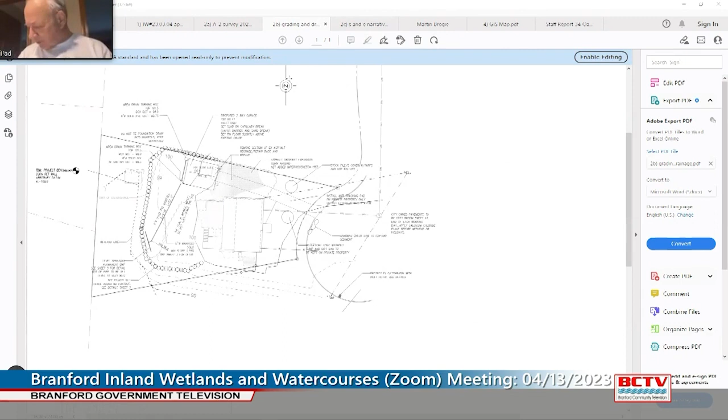So, is the map I'm looking at that was sent out different than the map you have? There's 3 pages, and I think the first page is front and back, so you might need to flip over the site plan. Is this what you're looking at? Thank you. Yep, got it.

There's also a slight discrepancy in the location of the shed between the 2 site plans. Nothing that should really have much of an impact on the wetland, but I've also asked for that to be clarified, just to make sure everyone's on the same page and it's being constructed where it's proposed.

So my question to the commission is, do you want drainage calculations? Do you want a perk test for the proposed level spreader location prior to implementation? And do you want to hold on to this application for review at the May meeting, or do you think it's appropriate for agent review?

And the level spreader is where again? The level spreader is located in the southwest corner of disturbance, pretty much. And Jaymie, this is Commissioner Botta—what's the distance between the level spreader and the wetland line? I believe it's approximately 10 or 15 feet, if I remember correctly. Let me look it up.

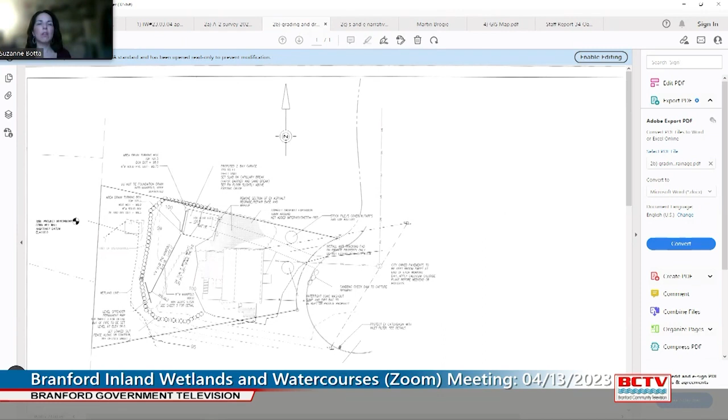At its closest location, it's about 13 feet. Well, the perk test that you were wondering about—where were you envisioning it, because the level spreader's function is just to slow the water down and to dissipate the energy, yes?

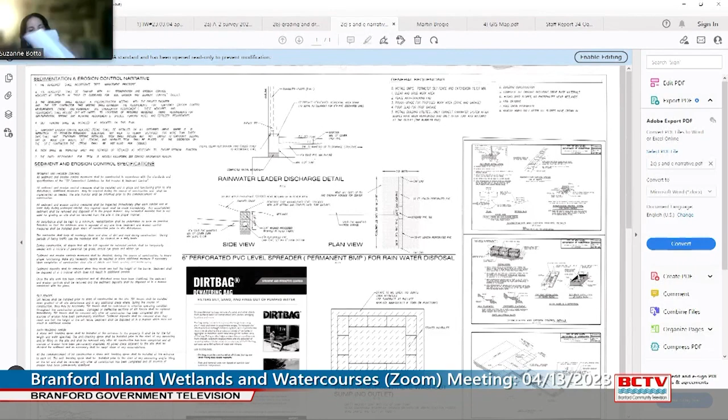So here's the detail for the level spreader. It's underground, and it's proposed to have grass over the top. So it's kind of more of an infiltrator in my understanding of it than— It sounds like it if it's underground. Yeah. Which is the third page of the 11 by 17s.

And is the intention that they'll get the first flush? But it's for a 2-car garage, and then the overflow is the bypass—there's a bypass T, so it would basically overflow and discharge at grade. So my thought is, if this infiltrator level spreader isn't really going to work if it's going to be in groundwater, it would probably make more sense to have it just sheet flow from the garage or do some alternative drainage management, rather than dig up a trench across the yard and put in stone.

So I don't know. Yeah, this is Commissioner Botta. I tend to agree - that close to the wetland, I can't imagine they're going to get much infiltration there. I'm not really sure what the function of

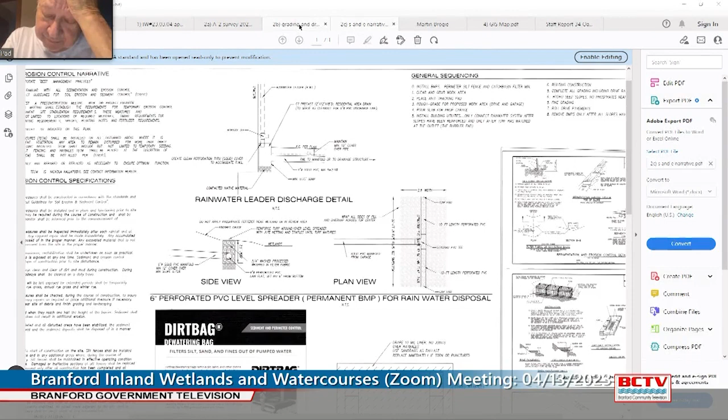Or some other alternative drainage system if the homeowner doesn't want to have it sheet flow. How much yard are we talking here for it to dissipate? So from the garage to the wetlands, about 40 feet.

It looks like I didn't throw the pictures in the Dropbox, but I believe I do have some pictures of the yard if you think that would be helpful.

I mean, this is Commissioner Botta. I wouldn't want this to go to agent review. I think we should look at this one more closely. I think if you're going to go back to the property owner, it would be with these couple of questions - we need some clarification on why they are trying to infiltrate.

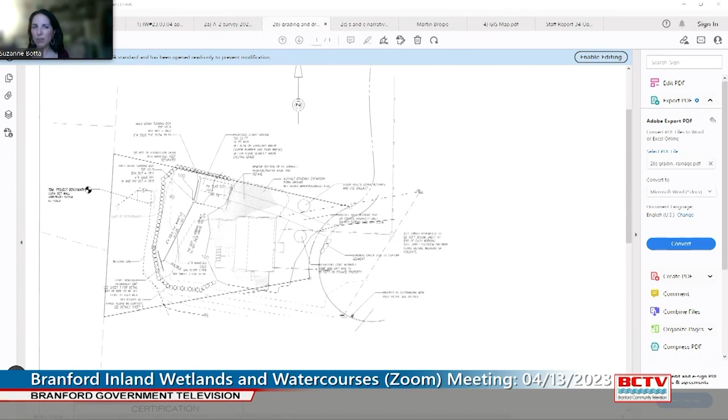Can the ground there even take any of that water in, so they can do a perk test? They could also consider a different way to manage this water coming in, because it doesn't make any sense to have it infiltrate that close to the wetland.

But maybe their engineer has a solid explanation as to why. I would just be curious to hear from their engineering how they came up with this plan and what are some other things they considered as they planned.

This is Commissioner Basson - I think as well, I don't see any calculations regarding the hydrology. Yeah, I did have a brief conversation with the engineer about the fact that there were no calculations or perk tests. He said he did have a conversation with the client that those things might be required and that he could submit them upon request. So given the timing of that conversation, I figured I'd ask the commission.

So I will follow up, and it'll be continued to the May meeting.

Next up, inland wetland 230305, 122 Flat Rock Road for a pool. Possible agent approval. Jaymie Frederick, inland wetland agent.

So I met with the pool contractor on site based on what we discussed, the scope of work. I said it could be an agent approval, but the application materials that were submitted kind of lacked some clarity and information, made it look like activity was going on to a slope. So I'm looking for additional information to clarify.

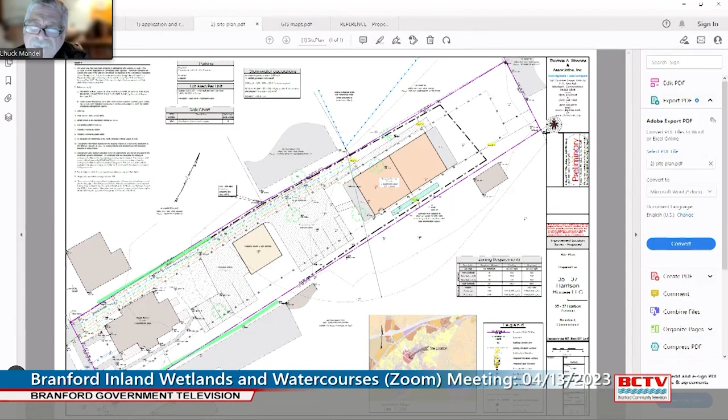I should have asked for an agent approval to save time, but that's up to the commission. If they want to set a walk, feel free to, I will stake out the buildings if they want to see it. The garage we're showing to the west is just a future proposal. We're not proposing that at this time, but we did show it in case we could get the approvals. We're just going to add that, but we're not really prepared to do the construction at the same time with the other structure. We're also proposing to capture the first inch of stormwater. That's the cyan area to the east of the building.

This is Commissioner Bassman, just to make sure I understand the clarity associated with what used to be a wetland is no longer - when was that determined? So on our site, there are no wetlands, and the site to the north, in 1999 it was a filled wetlands. Yeah, there's the report right there.

So just to clarify, in the 1999 investigation, it was still considered wetlands on the adjacent property. It says shallow fill, and based on the wetland delineation approval at the time, it was still considered a wetland, but it was an impacted wetland. They did do a wetland investigation for the subject property. There are no wetlands on the subject property. I do think there is a slight sliver of wetland area.

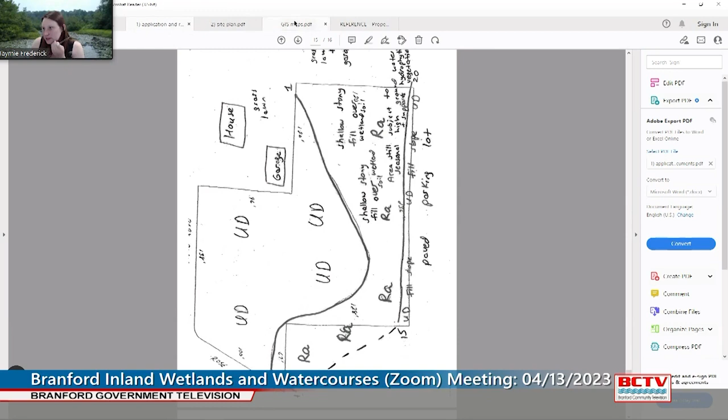So this is the subject property right here, the existing house, demoed garage, and the proposed structure would go somewhere in this area. I think there's a little bit of wetland still existing adjacent to this parking lot, and there's definitely wetland further north and west of the subject property. So I do think it's still within the commission's jurisdiction. I think this area of 42 Park Place, if it were to be redelineated today, it might go from slight fill to having characteristics that would no longer be wetland. I don't know - so that's kind of the wetland history for the off-site portion.

Chuck Mandel, if you go to the GIS, it appears to be lawn area right now.

This is Commissioner Bassman. In the subject property 3537, it looks like there is kind of an elliptical area - I don't know if it's a depression or not. That's a contour. My guess is it's showing as a slightly higher elevation. It could just be because of the tree cover, or it could actually be a slight high spot. I'm not sure.

Chuck Mandel: Commissioner Bassman, we did do some topography. If you go back to the site plan, Jaymie, it's relatively flat, but there has been some activity, I guess, so you can see a depression right in the center there. Oh, actually, that's a tree right there, but it could have pushed the grade up, so the aerial contours might have shown that as a little hump in the lot.

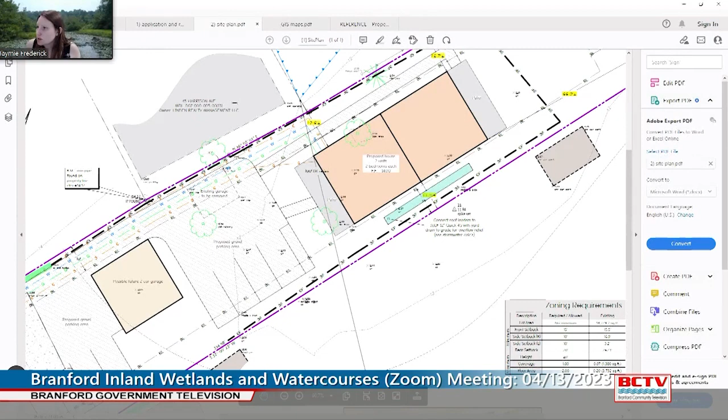This is Commissioner Bassman. Does any commissioner feel the need for an updated assessment of wetlands or not? Well, to clarify, they did do an updated wetland assessment on site. We can't require them to do an off-site wetland investigation. So my assumption is that there's still some remnant of inland wetland, which is why I required that they submit an inland wetland application. So I would say there's no further wetland investigation for them to conduct. They've submitted the new wetland assessment.

Right here, CLA engineers, soil scientists. Robert Russo went out October 21st, 2022, and investigated on site. The soils at the site show signs of past alteration and no wetlands or watercourses regulated by the town or state were present. Chuck Mandel noted, in addition, that band of wetlands Katie's referring to is actually there.

That's been filled. The adjacent lot is all parking right now, so there's a large area there. If you went to the aerial, the GIS aerial, you could see that it's all paved parking right now. You can see the cars parked along there, and that's a relatively steep embankment. At the base of that embankment, there's standing water at times.

That's absolutely possible, yes, but it appears to be a very low value. If it is wetlands, it's been severely compromised at this point, and our proposal is going to create no additional impact to that wetlands.

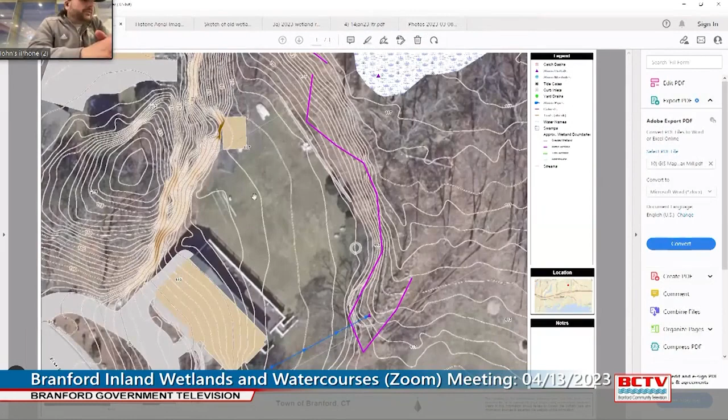Commissioner Bassman: Where does the property line in this picture rest, Jimmy? Is it on this side or the other side of that tree that's right in the middle standing up? I do not know where the property line is, but it's well on the other side of that bent-over tree. There's a lot of fallen trees pretty far back in that area, and that is on your property, right?

I'm sorry, what was the question again? A lot of the trees in that picture - if you said it's way on the other side, those fallen trees - here's the house, here's the wetland line, and the property line's way back. Quite far back. Got it.

And all of those trees are large trees that are just down in contact with the earth. You can kind of see them basically on the wetland line and on the other side of the wetland line. And on the slope itself, there's a lot of woody debris, cut limbs, things like that.

That's what's on the slope - the Christmas tree, that stuff - that's what I'm looking to do, just general homeowner spring cleanup with brush, all that dry brush. Not to include those fallen large trees. No, I don't, I would not. I'd rather not move all those fallen large trees.

When Matt Davidson came out, he felt that would disturb a lot of wetland area, just because those are the ones that came down in the microburst. Some of them still have large root piles that are attached to them. So because he walked through there and felt a lot of that was in contact with the soil itself, he felt that over time that'll just eventually become part of the ecosystem back there.

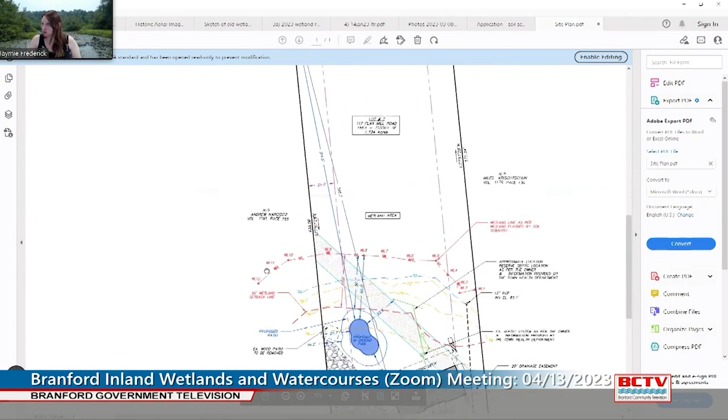Yes. So this wetland line you're seeing on the site plan is a new delineation that Matt Davison did within the last month or so. This is John Sewell, the homeowner. He did it on April 5th.

This is Commissioner Begeman. I don't know if anyone remembers when we were looking at that school, it was a school that had grass all around it that was once wetlands, inland wetlands. I don't remember if we had the old lines and the new ones on it, but that would be something to take a look at. This town property had a new wetland investigation done by a soil scientist. There was no updated map.

This is Commissioner Botta. I would say for the sake of caution, I would include those. I need to think about it and look back at some of our guidance from the state, and this is not the moment to do that, but I need to look at that stuff first. The most conservative thing to do would be to put in a historic line, and that won't hold them up if we end up saying you don't actually need that. But it would be better to put it in and be able to remove it than for that to be a sticking point later. I just need to look at some of the guidance from the state and the legal updates.

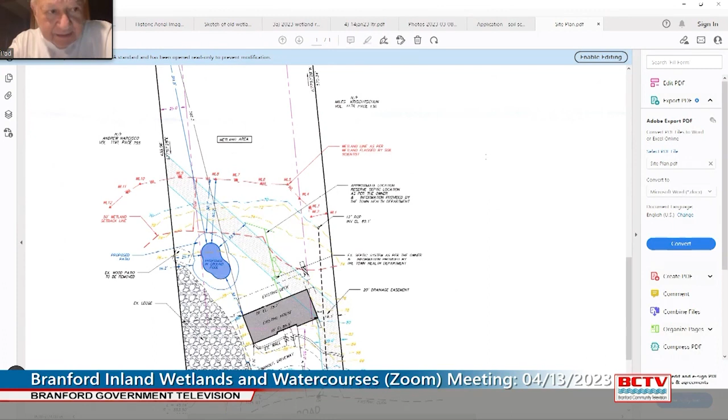Okay, this is Commissioner Bassman. By the way, when I sit on a state wetland conservation group, hardly anybody files that process that Jaymie talked about, because it's a cumbersome process. It takes time away from the day-to-day, and people don't want to invest the time in something when they can denote it as informal and get kind of the same intelligence without having to go through that formal recognition process.

Back in 2016, when we were possibly going to get new model regs, they were also looking at trying to promote a revision to the state statutes to modify the map amendment regulation process to make it a little more user friendly all around. But those things kind of just got tabled and never moved forward.

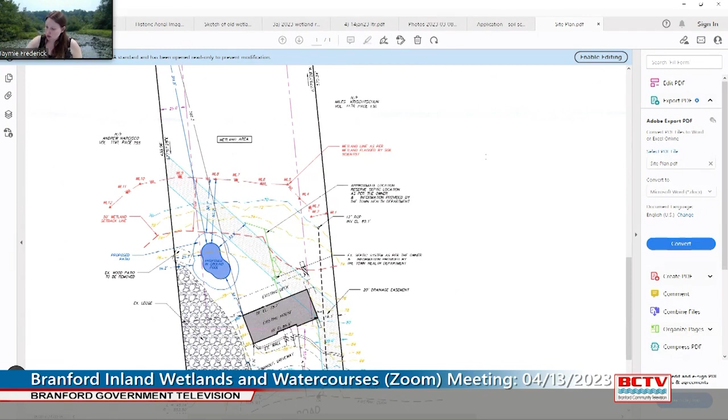So I would just say it sounds like what we're doing would be consistent with recent practice. If we're looking to change it, we should just document what that is moving forward to make sure that we are treating all applications uniform and fair.

So we will have them add the old wetland line in addition to the silt fence, the revised 100-foot upland review area, and stockpiling location. Is it important to the commission that the pool enclosure fence is added to the site plan, or are you okay with me reviewing that when the building application is submitted to make sure there's no issues with it? It's pretty minor activity, and I would imagine it would be above the top of the slope.

Yeah, I'm okay with your review, Jaymie. Do we know what kind of filter system the pool uses? I'm not sure, I can't see.

Sorry, John Sula, homeowner. Dave said it's the environmentally safe one. I know I'm paying extra money for it. Cartridge filter? Yeah, I think that's the one. Okay, I'll follow up with that in addition to the comments regarding the enforcement.

The last question I had pre-noted is, does the commission want the mitigation areas to be shown on the site plan? And if so, should it be shown relative to the application or relative to the enforcement, or why not both?

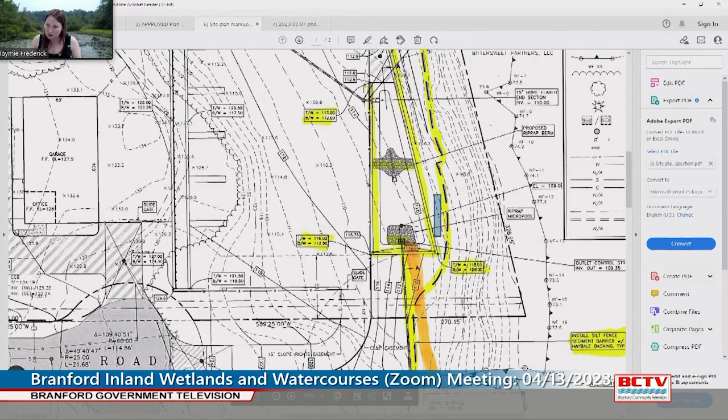So there is some stone placed within an actual wetland area. I don't think it's having a negative impact that requires immediate attention. There's a little bit of sediment buildup in the riprap swale, but I think that's coming a lot from stormwater runoff from the road. And this access drive shown here is not on the site.

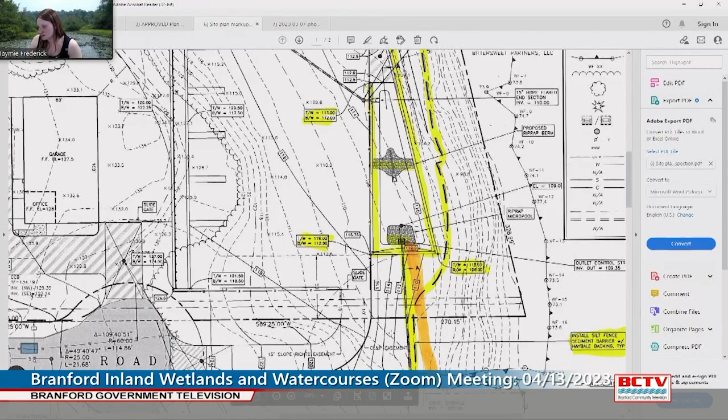There's a pool water filling station over here. Whenever people use it, water leaks out of the system and it concentrates. So that has been addressed for the time being and isn't actively causing additional issues.

But there are certainly things that I think the commission needs to look at sooner rather than later on site. So like I said, I'm hoping they'll have something for the May 11th meeting that the commission can look at as a modification to the existing permit.

Any additional questions, concerns? Not at this point. I'll follow up telling them to have it ready for May 11th.

Thank you. All right, we're now into other business. Inland Wetland 191101, 1151 West Main Street, construction of bank and grocery store and associated improvements. Two items: monitoring report and permit compliance, and number two, bond return request.

Dan, you've got some information regarding the monitoring report?

I need one minute, sorry, gotta blow my nose. Gesundheit.

Apologize, my cold is really catching up to me. All right, so I have received an as-built survey. I've received a letter that touches base on the rock slope in lieu of retaining wall on site, and I've received the second monitoring report for the first year of monitoring, which was due this past fall.

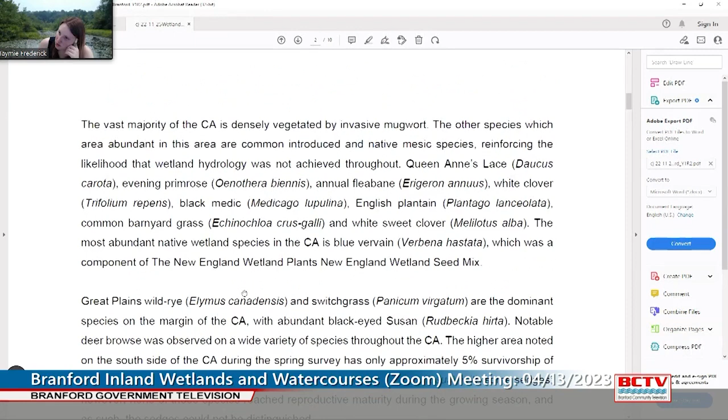Do we have a sense of why a large area like that didn't take hold? Is it lack of hydrology? Is it something that wasn't considered when the plan was developed? Just so we don't repeat the same thing again. It could be the micro topo, or it could have to do with the soil that was brought in, or whether that area didn't receive sufficient wetland soil mix. I'm not really sure—I did read this report, but I read it last week and haven't reread it this week, so I'm not sure if Matt dives into that.

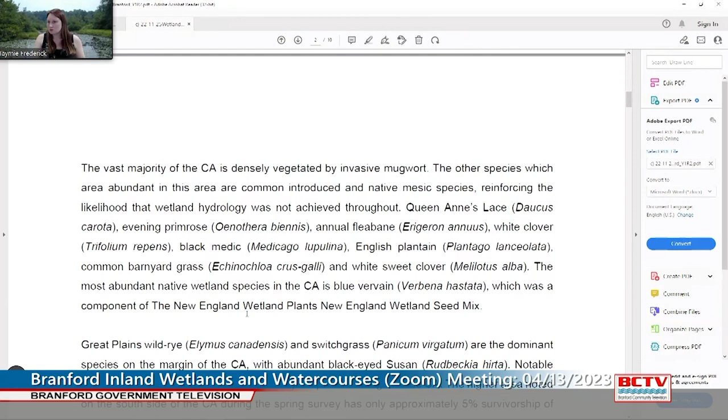Guess looking at the larger picture, how do we learn from these experiences, if we just come away with more questions than answers when something fails?

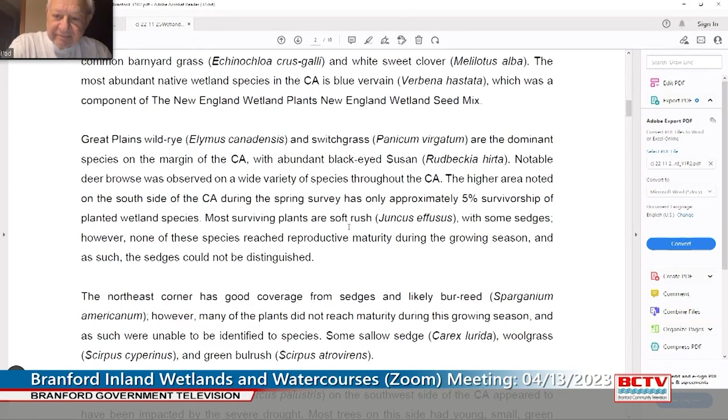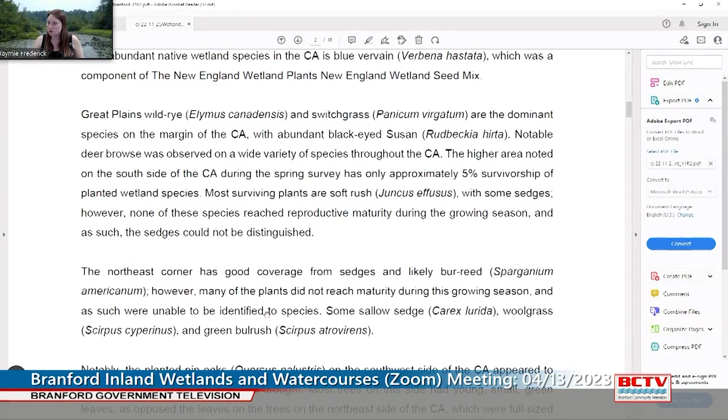Yeah, so I think part of it is trying to—maybe I can take another look at this. And if that information is not already in this report, we can ask the soil scientist to speak to that a little bit more for further consideration.

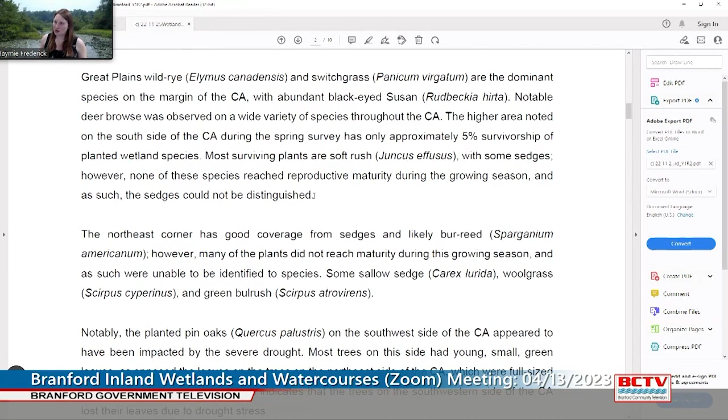I think part of it is acknowledging that one thing the commission could require is more documentation along the way, like a report at time of wetland creation from a specific professional who was to be involved in that process.

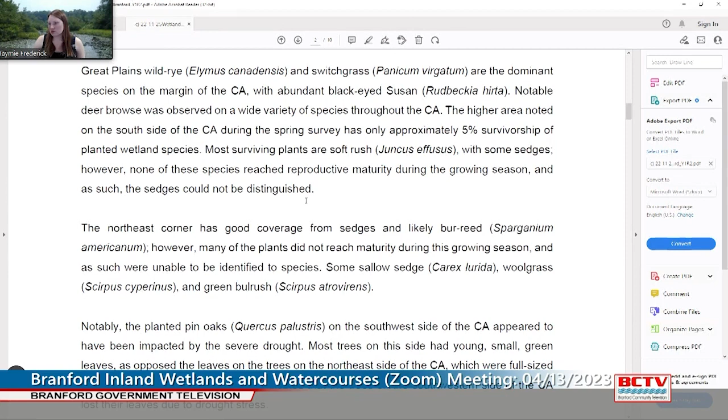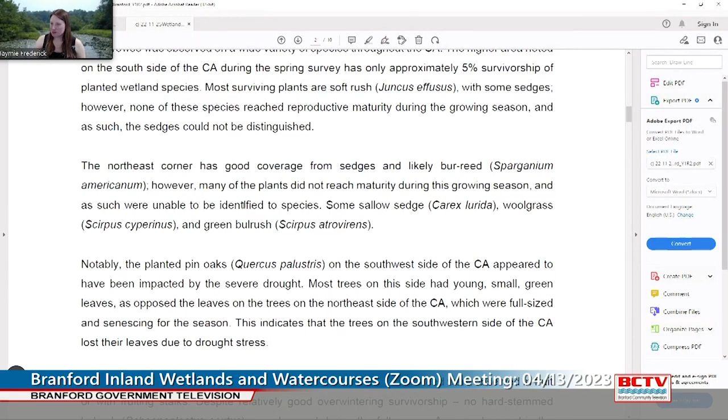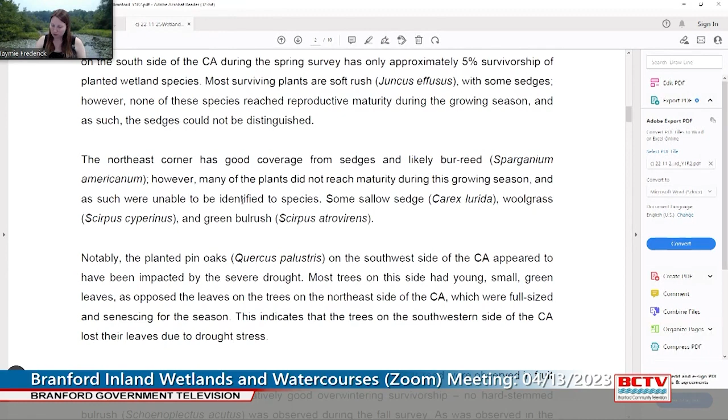Then the other part is having these corrective actions. So the question for the commission, aside from figuring out how to apply this with future practice, specifically for this site would be: does that wetland creation area need to be restored to what was originally approved, or is the commission open to a modified plan for that area?

I'm going to pause and let the commission talk. Commissioner Bassett: what would be the difference between a modified plan and the recreation, if you will, of the original plan?

So if you were to have them go in and do the original plan—and I can let Giordano speak to this because they have experience with what it would actually entail—you'd have to bring equipment back in. You'd be removing material, bringing in new material. It would be starting all over again, freshly disturbing and stripping it back down to ground level to make it what it originally was proposed to be. So the reason it was suggested to adjust to current conditions is because of that trade-off: going in and having all that ground disturbance again versus not having confidence it will result in a different outcome.

Well, this is Commissioner Botta—but the purpose of that was to replace wetlands that were taken, correct? That is the function of that area, to replace wetlands that were filled. It was part of the mitigation for the wetland impact. I didn't look up, though I know we have a 2-to-1 requirement—I didn't actually check what this application required, whether it was 2-to-1 or slightly more.

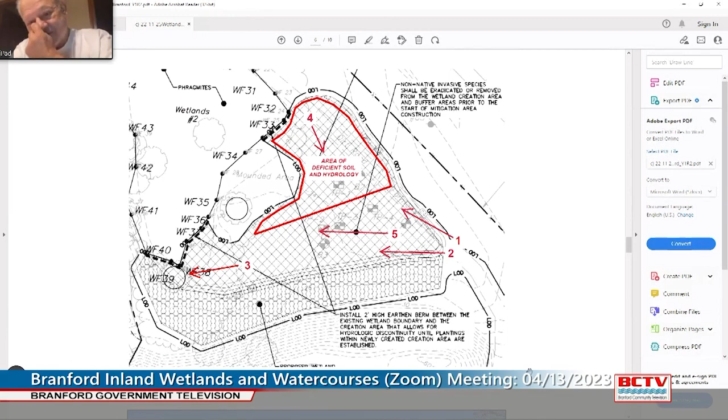Well, I would say if the commission's looking to have the original plan re-implemented in that area, then probably you would want to have the soil scientist and the engineer involved to make sure that elevations are correct to promote success, and that the right amount of material is being brought in.

I don't know what the differences are in sub layers below that soil being brought in for the wetland mitigation. I can't guarantee that if they go in there and redo it, that it's going to work. There's probably some things that could be done that would certainly increase its success in achieving the original goal, but...

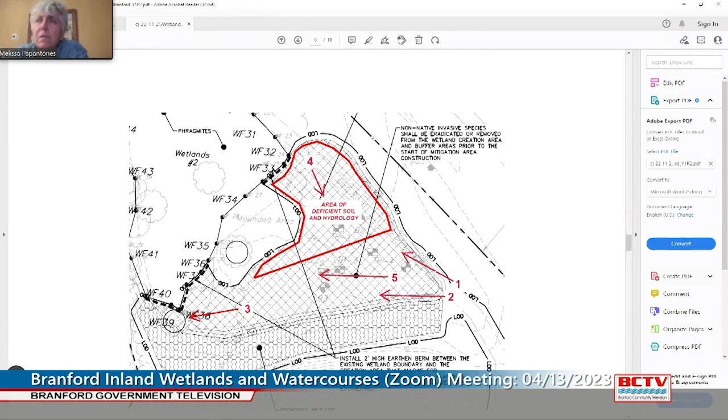Commissioner Papantones, I remember reading in the report something about the severe drought last summer affecting the plant success rate. Yeah, and that might have affected the establishment of the area as well, because I know the trees have suffered, the oak trees that were planted, and a lot of the herbaceous growth didn't fully mature because of the drought conditions, and there's only so much you can do about that.

The report doesn't exactly address whether the 85% success standard is met, and I think it's kind of hard to identify. At this point, I think all of the oak trees are still alive. I think a lot of them are struggling and not necessarily doing well, but they're all still alive and could recover and be perfectly fine.

I think it's important this year that maybe watering bags are used to supplement, should we have more drought conditions, on those trees. And regarding the herbaceous growth, without it maturing, they can't be identified. So it's hard to establish a percent cover of the planted plugs too, and desirable native species. So there's kind of a lot of moving targets with this.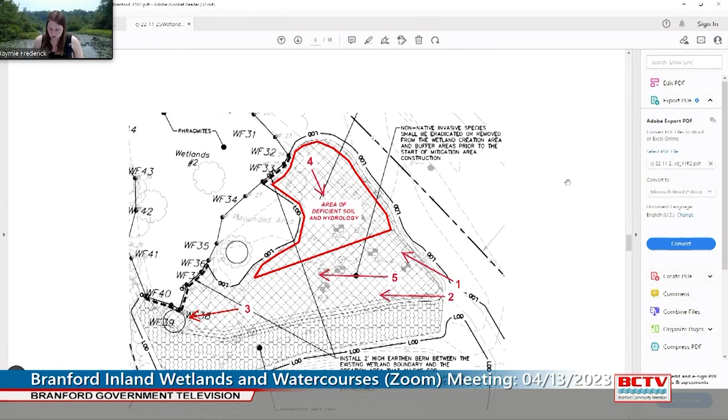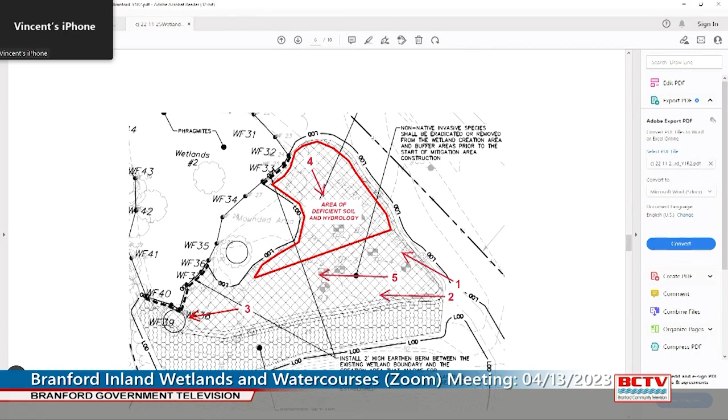I think that I understand the concern of the wetland perhaps not performing as anticipated. But Davidson provided this solution because of what he saw when he was out there. He was out there when we first started, when we began, and everything was approved. It's not like this was just done in the dark of night. All this was done per proper requirements, and Matt was out there and observed the installation. So I think what he's trying to do with this plan is achieve success.

It may not be exactly what they intended when they designed it, but that's what he's looking to do, and what he's looking to provide the town and the Wetlands Commission here is a successful situation. You've got a lot of invasives that the prior property owner, they were not in our contract, so the prior property owner did not deal with, even though we suggested that he do so.

So there's just a lot of different factors going on out there that, taking into the totality of it, it took a while for this report to come to be. And I think the whole point of it was to provide something that would be successful, and that would work, and that would be a benefit. And I think, as Jaymie mentioned earlier, there's a reason why you guys do this 2-to-1.

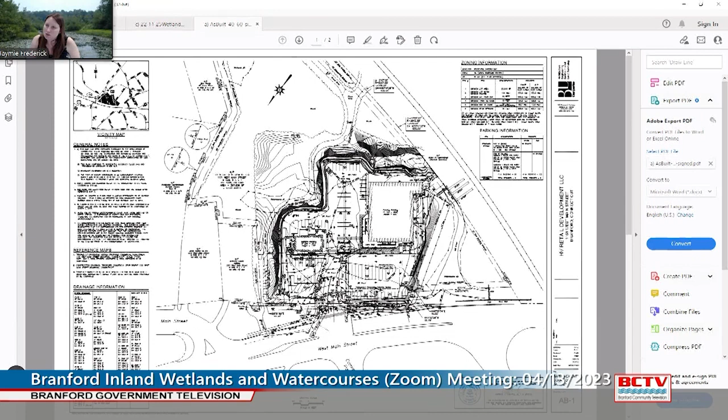Again, that was not in our contract, so I don't know what the owner's contract would cover, and that's why all this took so long. None of this, even the part we're doing right now, is not in the Giordano construction contract. We're doing it as a favor to the project and to the owner. But yes, we had to create it, and yes, we're standing behind it, and we had to pull the bond, so our bond money is associated with this. But again, the invasive species management was not part of our contract. None of the stuff in the beginning, and all the as-builts, was all by the owner.

So it is a bit of a weird situation. I don't know if the commissioner is aware, but there was one owner that submitted the application and did the development, and the property has since changed hands. So there are a bunch of different players, and we're dealing with one player at this exact moment. So I think for the commission's consideration...

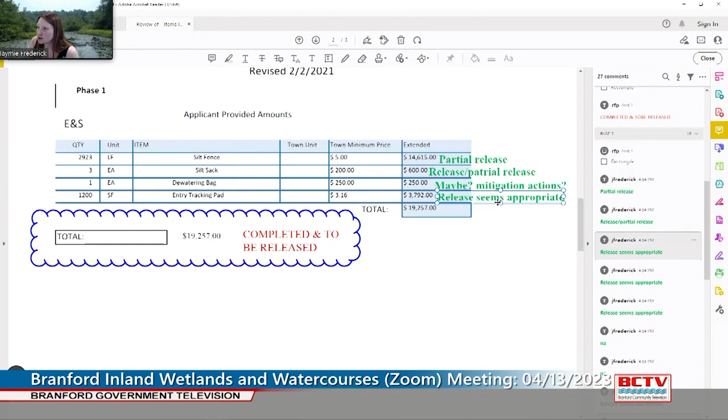I might have missed something. Yeah, can you scroll back up? Is it just that section under E&S? It's E&S phase 1 and 2. So there's the $3,792 for the entry - that might have been the dollar amount I was missing.

You went too fast, go back. You said to double check. I was trying to double check. $3,792 if we're just doing full release ones.

92. Okay, and then $770.64 for the swale, $6,344 for the stone check dams, $7,474.60 for the erosion control blanket, and $1,800 for the temporary sediment trap.

David, sorry - you said 19? I got $20,181.24. Me too, okay, me too. I didn't think I did it right. So did I - calculator, that's the winning number. 21,000? No, 20,000. 20,000. One person.

20,181.24. I obviously did a wrong line there. Yep, I can see. So that would be 10,000... Swale.

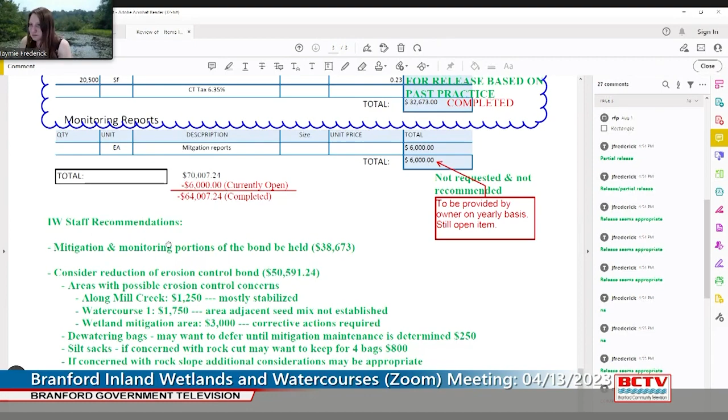This is Commissioner Bassman. Commissioner Boda, what Inland Wetland number did you quote? 20.07.01, it's what's on the top of the bond estimate. Is that the wrong number? Hold on, I think weren't we 19.11.01? Revised to Inland Wetland 19.11.01.

This is Commissioner Beck, I second that motion. Any further discussion? Yes, we need a roll call on this one, Jaymie.

Yes, please. Commissioner Begerman, aye. Commissioner Boda, aye. Commissioner Papatonis, aye. Commissioner Ormrod, aye. Commissioner Basserman, aye. Can we put the other screen up, I want to make sure I get everybody. I think I got everybody. Did I get Commissioner Begerman? You did, okay.

Any nothing else on 19.11.01, correct? All right, continue the review of the status till next month. Inland Wetland 21.08.02, 61 and 65 to 99 Durban Drive, conversion of existing building to age-restricted multifamily residential development. Permit modification request.

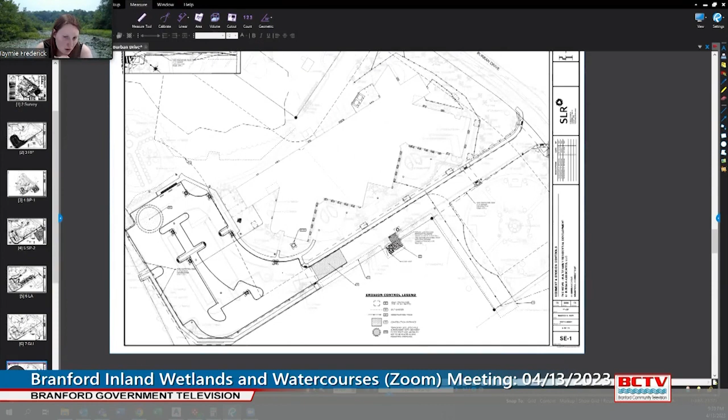But I would like to point out that all direct wetland impact improvements they're proposing were either requested by the Inland Wetland Commission or by the WPCA. Given the fact that it's a replacement request to help prevent infiltration of sewage, it was something the commission would like to see, and it was fair to consider as a modification to the existing permit.

Thanks, Jaymie. My name is Todd Ritchie, a professional engineer with SLR Consulting. We came before you representing 61 Durban Associates, and this is the 61 Durban Drive project, where the existing building has been previously approved to be repurposed into housing units.

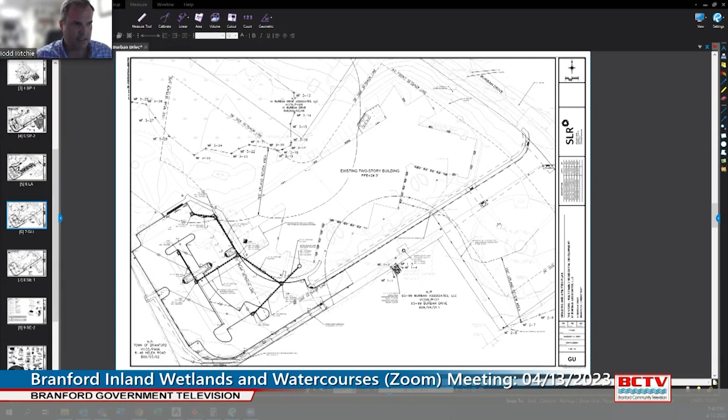As part of that process, later in the town's review process, we did have to go before WPCA. At that time, they required us to investigate the existing sanitary sewer service from the building.

The existing sewer lines are within the wetlands on 65-99 Durban Drive next door. They basically go underneath, in and out of wetlands throughout the site. There's a sanitary pump station on that site, one of the town's pump stations, so the sewer for this part of town goes to that station and gets pumped to a different location. That force main pump line, as well as another gravity line from the south side, joins into that station on 6599.

But for this particular project, 61, this sanitary line is pre-existing, as this parcel was developed in conjunction with the 6599 address, because this was the church, and this was, I guess you'd call it, the old monastery, the convent or retirement home for clergy.

So this was brought over onto this property, and this is the sanitary line as we've identified it right here. It has 2 lines that come out of the building, join into a manhole, and then discharge into that manhole. As Jaymie mentioned, this is the wetland line right here, and it enters the wetlands where the manhole exists today.

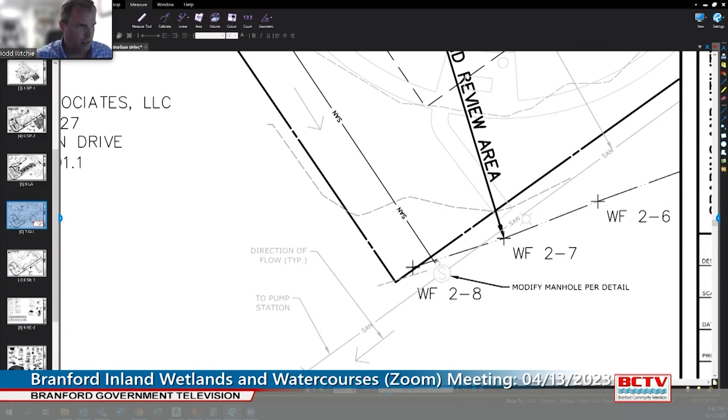I'm going to pop to the next drawing - this drawing set is the actual permit set from the planning office that was signed off on for the building permit. This can obviously change if you have any additional input or requirements as part of your approval. We show this dotted line, which would be the limit of disturbance and the silt barrier, a silt fence. I believe it's usually a silt fence backed by... it's been a while, sorry.

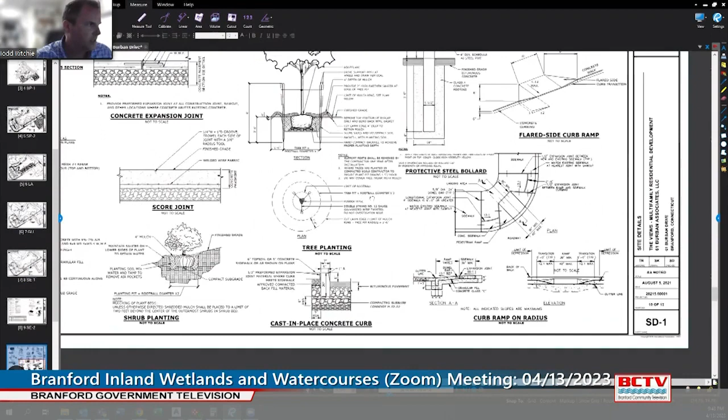It's usually a silt fence backed by hay bales, or just a silt fence itself, or any type of barrier that you would want given that we're actually going into wetlands.

As you can see, there's a couple of trees over top of this line. That's something that would be replaced in those locations, since they shouldn't have been there to begin with, over top of the utility. So it will be replaced in the same location.

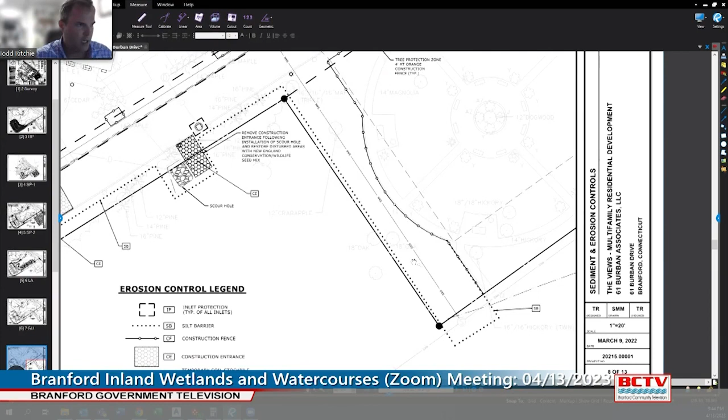This dotted line is brought in this manner, and I measured about 500 square feet of actual outline within wetlands. The reason for that is, for doing this work, they do have to have access to the manhole, at least with people, and keep this barrier back so they can have proper access.

Confined space entry requires a tripod and that type of equipment. We don't want to have them tripping over the silt fence and that sort of thing. It doesn't mean this is all going to be disturbed.

The disturbance is going to be limited to a trench width up to the manhole itself, with a trench box. So this is just a foot and workers area here, with foot traffic, and the actual direct impact or excavation will take place in a trench about 4 or 5 feet wide along this line up to the manhole itself.

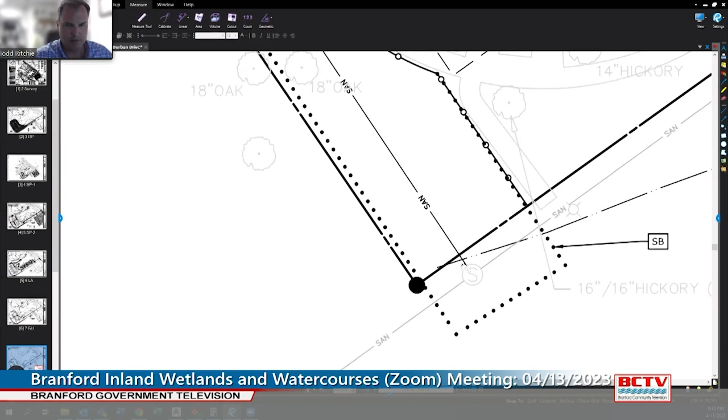I think that's it. I don't know if you had any other outstanding items, Jaymie, on some of the lists that you sent ahead of time.

That's basically all I have. It's just complying with the requirement of the WPCA.

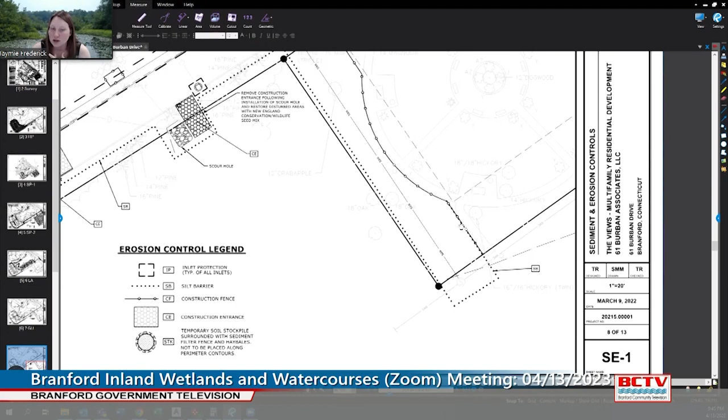So for the commission, the comment I had was that temporary disturbance within the wetland should be minimized. That was kind of just explained.

And then other conditions I think the commission might want to consider, should you decide to approve the modification, would be that any vegetation removed from the wetland or bank shall be replaced in kind to stabilize and restore the area. If there's a concern regarding replacement vegetation interfering with the sewer line, the duly authorized agent may approve an alternative.

And that an original copy of the revised site plan should be submitted for the file. We have a digital copy, but no paper copy.

Mr. Bassam: It seems pretty straightforward. As you indicated, Jaymie, these are certainly things that could enhance or help at least the wetland and the community with the replacement of the pipe. Seems to me that a modification to the existing permit is an appropriate vehicle for this project.

Anybody feel differently? Not to rush the commission, but it would require a motion.

I'll make a motion that on 210802, the conversion of an existing building to age-restricted multifamily residential development, in concert with concerns from WPCA and the removal of an existing pipe and replacing with a new pipe, that a modification to the existing permit is an appropriate vehicle for this project to commence.

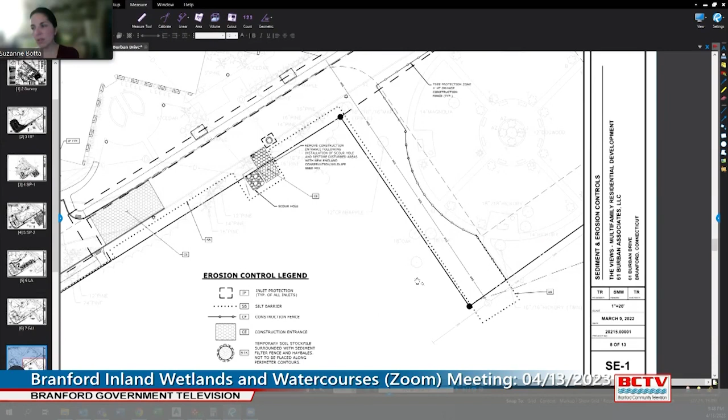This is Commissioner Botta. Did you want to incorporate? So Jaymie had made a couple of recommendations, which included the agent to approve any modification for the plantings, because it's a sewer line, you can't necessarily plant, but... I don't remember the exact wording she used. Yeah, I will look, that's on the screen.

Motion to include the following conditions: that any temporary disturbance within the wetland should be minimized to the extent possible. Any vegetation removed from the wetland or the bank should be replaced in kind to stabilize and restore the area. And if there is a concern with replacement vegetation interfering with the sewer line, the duly authorized agent may approve an alternative. And an original paper copy of the site plan should be submitted for inland wetland files.

Do I have a second on that modification? Commissioner Papantonis seconds the modification.

Commissioner Begeman: just a question on the motion. This includes the standard conditions, and when it's a modification, those previous conditions and provisions are already there, is that correct? Correct, all of the existing conditions would still remain in place.

Thank you, not a bad thing to clarify. Any other commission questions, comments? Okay, I guess let's take a roll call vote.

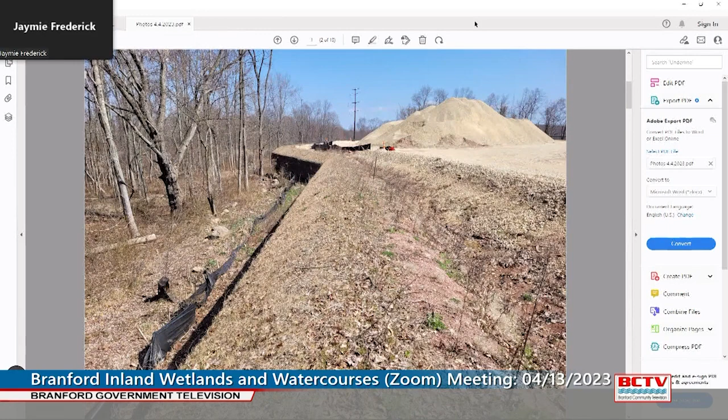Here's the retaining wall, silt fence, pretty well vegetated. You might be able to see some flags here for some of the mitigation plantings. Here you can see there's some damage to the silt fence, but it's not really needed at this time.

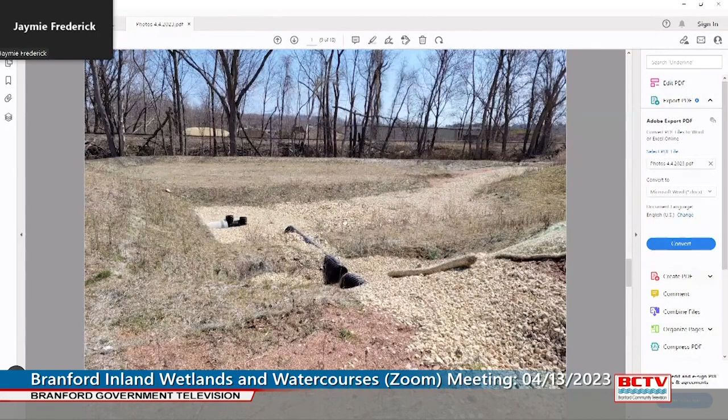Just to give you an idea of what the stability of the site currently looks like - this is the temporary sediment trap area, and this is the area where the activity got closest to the watercourse. This is for the sanitary sewer work, and this is the easement area for various utilities.

I think it might make sense to jump over to this plan that was received from the permit holder, identifying stockpiling, anti-tracking pad, and diversion swale. I didn't get any itemization against the bond amount.

I don't know if the commission is satisfied with the sketch or if you're looking for a phase plan from the project engineer for consideration of the bond reduction.

This came in on Friday towards the end of the day. I didn't have a chance to look at it because I was leaving for a site visit, and I've only been in the office Tuesday and Thursday this week, so I have not really spent a lot of time looking at this. I was hoping for some itemization.

I'm not sure if the commission's looking for a formal phased erosion control plan that addresses not only the current need, but future need. So that way, if you're reducing the bond amount but anticipate needing more bond once work starts back up, you know what that number is up front, so there's no further delay when they want to start work back up and everyone's on the same page and knows what needs to happen.

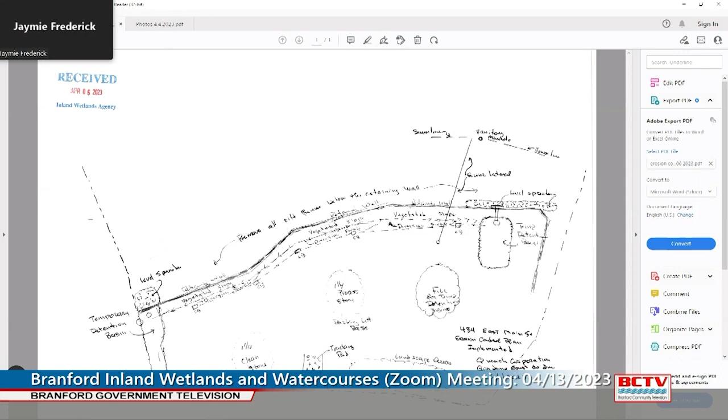If I may say something, so the last time we met with this request, we discussed coming back to the commission once we have installed the stormwater system and the catch basins, because they were not, even though we had the diversion swale at the time, all the silt fences, we had a stone berm in front of the diversion swale, which we still have. Since then, at your request, your suggestion, come back after you install the stormwater system, which we did.

We also made reference last time to the sewer lateral, both of which could have impacted the wetlands. The storm, less likely because it's all on top of the retaining wall, slope has been vegetated, everything has been protected. We had the swale behind the stormwater system. That, in my mind, wasn't at risk for impacting the wetlands. The sewer lateral did go through the buffer area, not into the wetlands, but obviously that excavation could have impacted the wetlands. We accomplished both of those successfully.

The only thing that's remaining in the wetlands area or in the buffer area, because the buffer is fully established at this point in time. There's no intrusion into the buffer that I've witnessed over the last 2 years out there, and I'm referring to 2 winters. The only thing that is remaining in the buffer area is the final connection of the sewer. We did put the full lateral in right to the sewer main, but the sewer authority does not want us to make the final connection until we have the final use. And that makes sense.